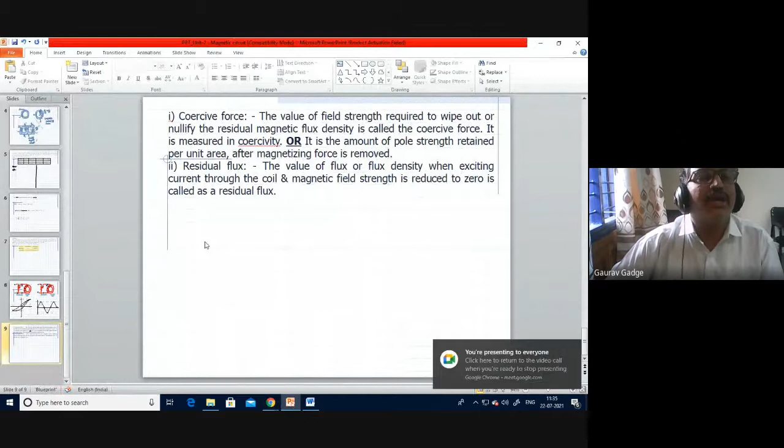So today's thought which I have shared, I think if you paid a little attention, every day I share one or the other thought so that everyone can understand, because you people are quite mature and you know everything.

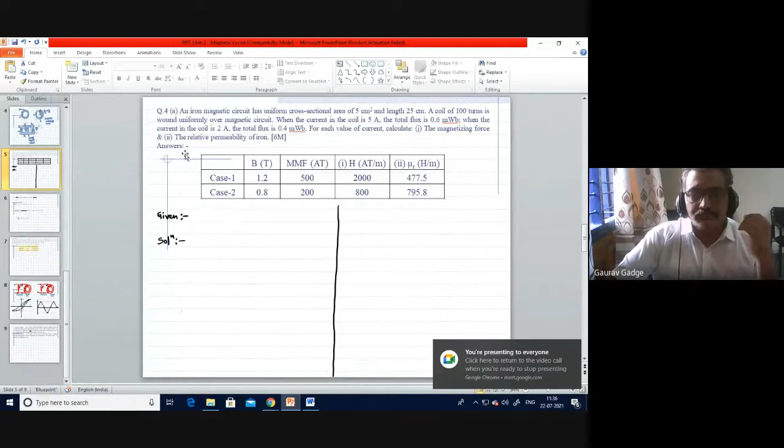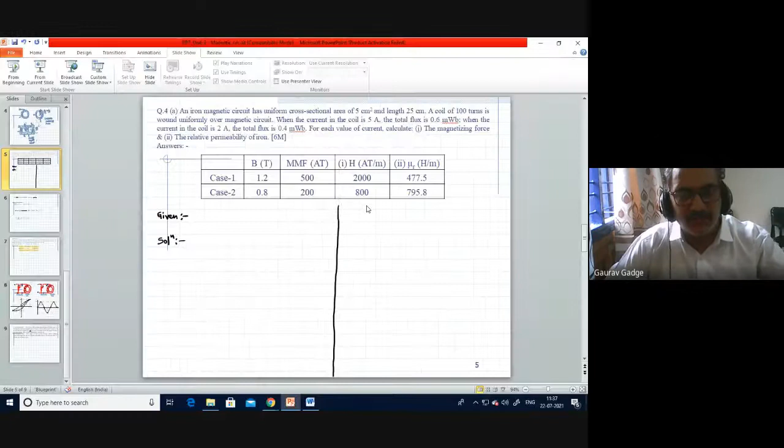So let us start with one more pattern of numerical which is generally asked in the examination. This kind of numerical, it was asked in the examination - a simple numerical, and here again you need hardly 1 minute or maybe less to solve it.

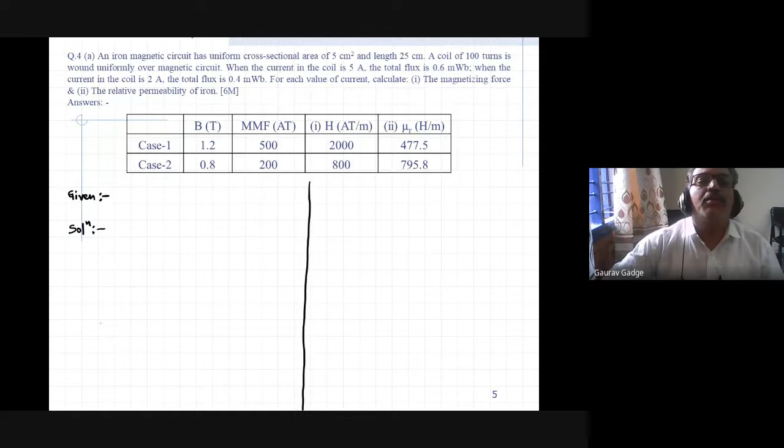Okay, so let us check what is given in the numerical. You have an iron magnetic circuit with uniform cross-sectional area of 5 centimeter square, and length of 25 centimeter. In fact, I want to ask you what are the given quantities - you can easily tell me which are the given quantities.

Can anyone tell me what are the given quantities? Anyone? What are the given quantities? Anyone?

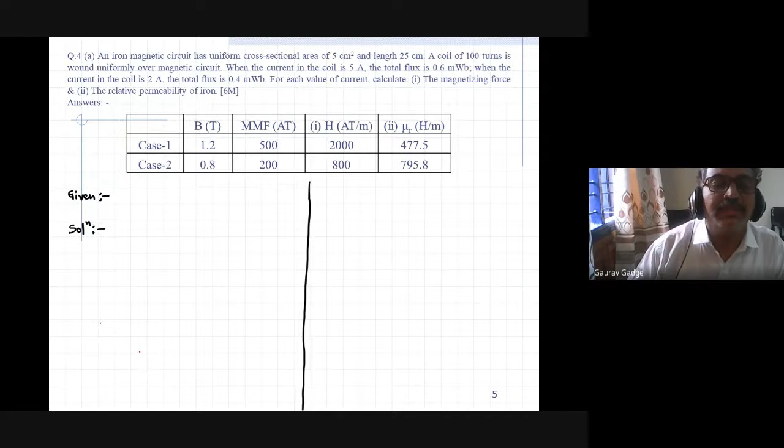Okay, so I just start writing down this cross-sectional area, first quantity. So area is represented as capital A or small a. It is 5 centimeters square. So the conversion is 5 into 10 power minus 4 meters square.

Then length of 25 centimeter, so it means small L. It is 25 centimeter, meaning it is 25 into 10 power minus 2 meter.

Okay. Then a coil of 100 turns. So what it means, we have N is equal to 100 turns, uniformly wound over a magnetic circuit. Now, when the current in the coil is 5 ampere, so we have I is equal to 5 ampere given.

Then total flux is 0.6 milliweber. So we have to convert quantities like centimeter to meter or centimeter square to meter square. Same way, milliweber to Weber is 10 to the power minus 3. You already have studied that scale in mathematics, like for the conversion of centimeter to meter or kilometer to meter. So all of you know.

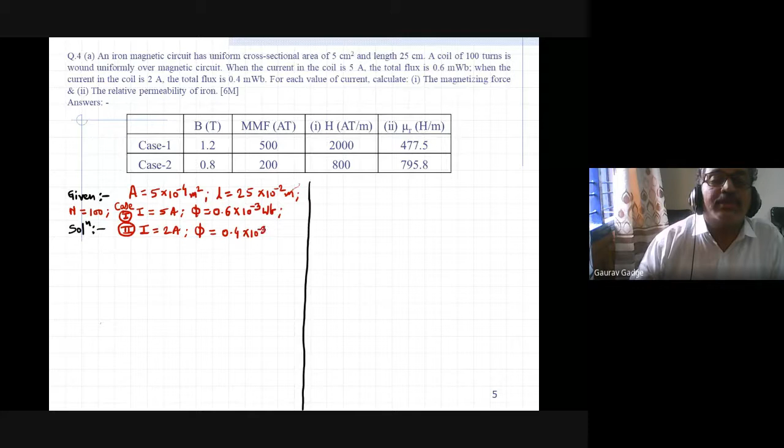So these quantities are given in the numerical with two cases, and for each case you have to find out the value of magnetizing force. Now, how is that magnetizing force represented? It is not a magnetomotive force, not MMF. This is magnetizing force, H. And the second quantity is relative permeability of iron, mu R. So these two quantities are unknown.

So now let us start with the solution. As there are two cases, let us find H and mu R for case 1. Now, let us write the expression. H we have to find out. Can you tell me the formula for H?

H is given by the equation, and all of you have to remember these equations, which are very important. H is equal to MMF upon L. Another equation for H is H equal to B upon mu naught into mu R. So we have two equations for H.

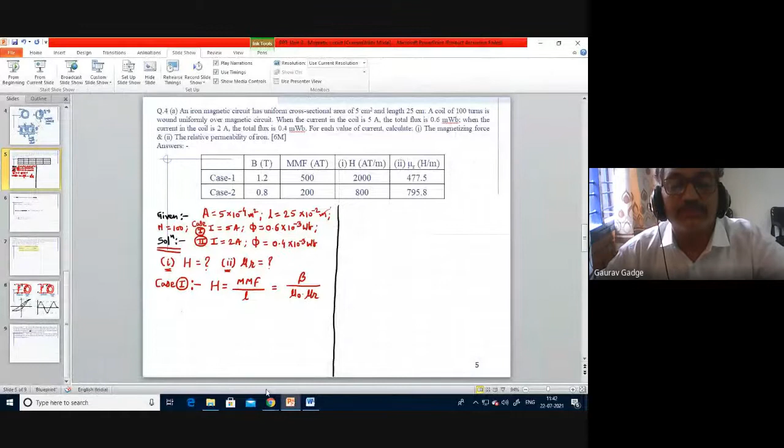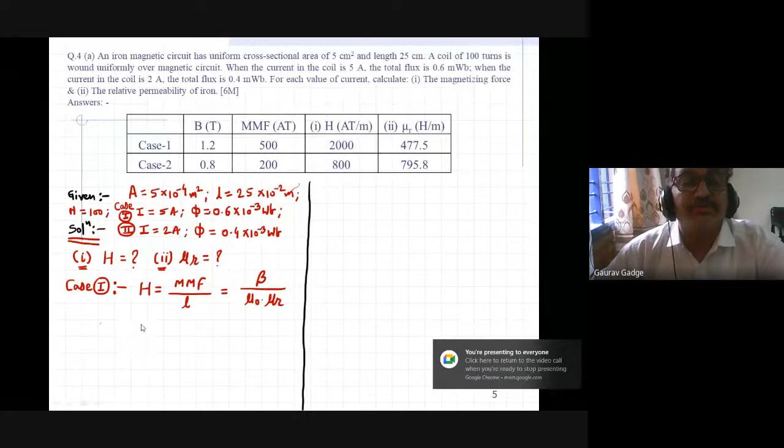Just a second, someone again wants to be in. It becomes quite difficult. Samir Kedar, try to be in the class sharp on time, because unnecessarily it creates problems for everyone. And for me it is bigger because I have to...

Fine. So I wrote two expressions for H. Either you use H is equal to MMF upon L, or H is equal to B upon mu naught mu R. In the second, you don't have the value of mu R, whereas mu naught is known. What is the value of mu naught, absolute permeability? It is 4 pi into 10 raised to power minus 7.

This you know, right? But you don't know the value of B, you don't know the value of mu R, and then you have to find the value of H. So it is quite difficult to find 3 unknowns. So let us use this expression: H is equal to MMF upon L. It needs MMF and L. L is already there, which is 25 into 10 raised to power minus 2. So MMF is unknown. Let us find MMF.

Now what is the expression for MMF? If you remember, MMF is given by N into I. It is equal to H into L, which we are already using in the above case.

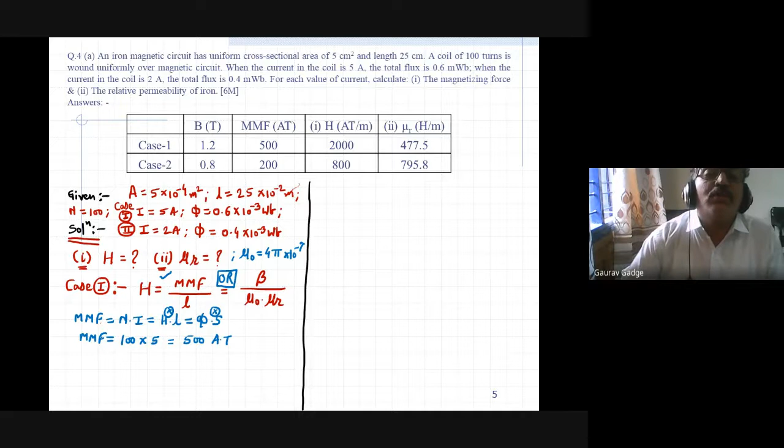MMF is equal to 500 ampere turns. That's all. Just check in the table. Yes, for case 1, just check in the table. For case 1, MMF is 500. Okay, now you can easily find out the value of H. So H is equal to, we use that equation, MMF upon L.

What is the value of MMF? 500. L's value is 25 into 10 raised to power minus 2, right? Now if I just take the 10 raised to power minus 2 upward, what I get is 500 multiplied by 10 raised to power 2, because it is written in numerator, divided by 25. Now just divide 500 by 25, otherwise you can use calculator. 25 twos are 50, so 20 into 10 raised to power 2, that is 2000.

So what is the value of H? It is 2000 ampere turns per meter. And this unit I have already shared how to get. H is equal to MMF, that is ampere turn, and length is meter. So therefore it is 2000 ampere turn per meter. Just cross verify whether we are getting the same answer in the table or not. Yes, we are getting the same answer. And this is for case 1 first quantity.

Case 1 first quantity. Now what you have to do? You have to find second quantity. And what is second quantity? Second quantity is mu r. Now how to get mu r? See, again you have two equations where you find that mu r. First equation is S is equal to, if you remember, L upon mu naught mu r into A. This is one equation. Okay.

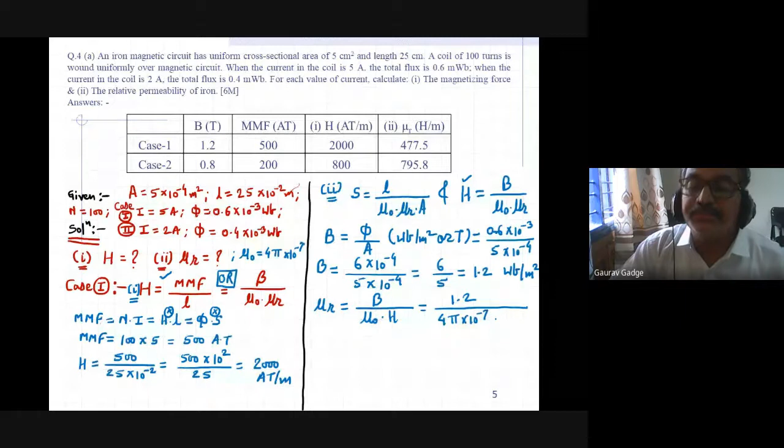Now, if we have B, if we have H, we can calculate mu r. So what I can now write is, just see very carefully, mu r is equal to B upon mu naught into H. Now, what is the value of B? That is already calculated, 1.2 Weber per meter square, upon 4 pi into 10 to the power minus 7, correct? Now, multiplied by H. What is the value of H? It is 2000.

Okay. Now, you have to use your calculator, because these calculations are somewhat difficult, where we have to use pi, and pi's value is 3.14 or 22 by 7. So it's always better to use calculator to get the value of mu r. And from table you can see my answer is mu r is 477.5, and its unit is Henry per meter.

Okay, so that's all. These are the answers which are asked in the numerical, first quantity H and second quantity mu r. So we have used two equations, H equal to MMF upon L for getting H, and for getting mu r we have used H equal to B upon mu naught mu r. So by adjustment, mu r is 477.5. Okay. Now, any question, any query?

So for case 1 we have done. Any question, any query?

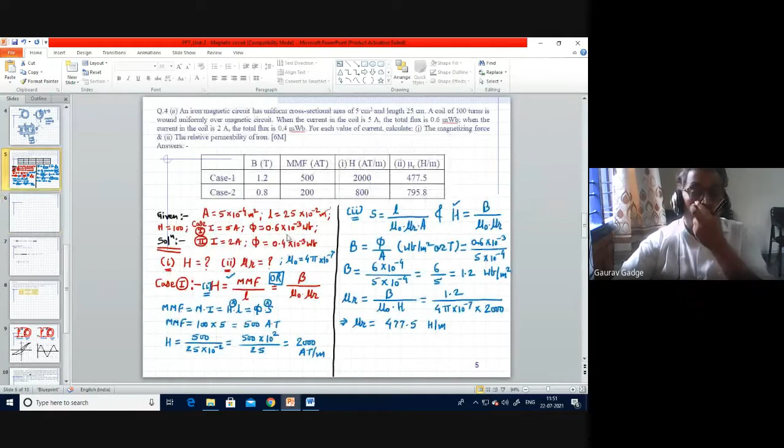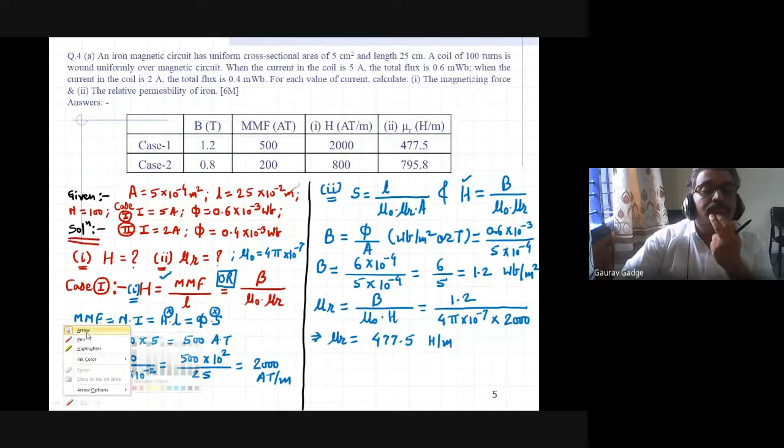Any question? So second वाला समझो. Second वाला. So S equal to L upon mu naught mu R into A. This is one equation, and in this you find mu R, which is to be calculated. So we can use this equation to get the value of mu R, but the only thing is here we again don't have the value of S.

So S can be calculated by referring MMF upon phi. By using MMF upon phi, we can find the value of S. So here we can use either this equation or this equation. Now H equal to B upon mu naught mu R. Here we have the value of H, but we don't have the value of B.

So what I did is I just preferred to have B ka equation. That is, it means I preferred to use H का equation instead of using S equation. S reluctance के जगह मैंने H magnetomotive H माने field intensity का equation use किया. So B की requirement है.

Anyone? Yes, sir. Okay, so there is no issue with case 1 now. Okay, so just start with case 2. Now what is there in case 2?

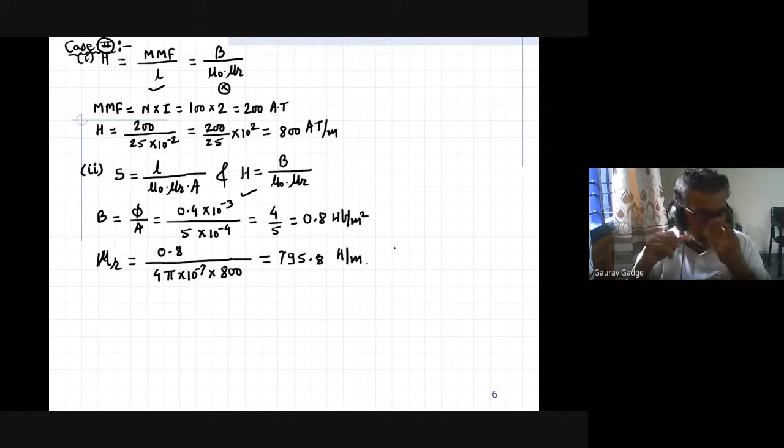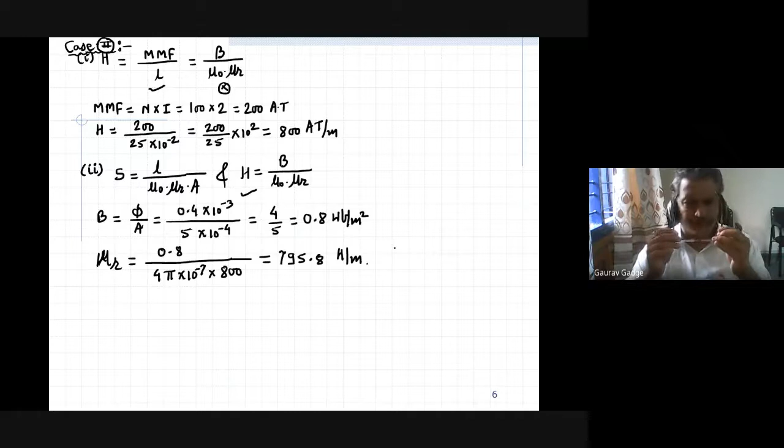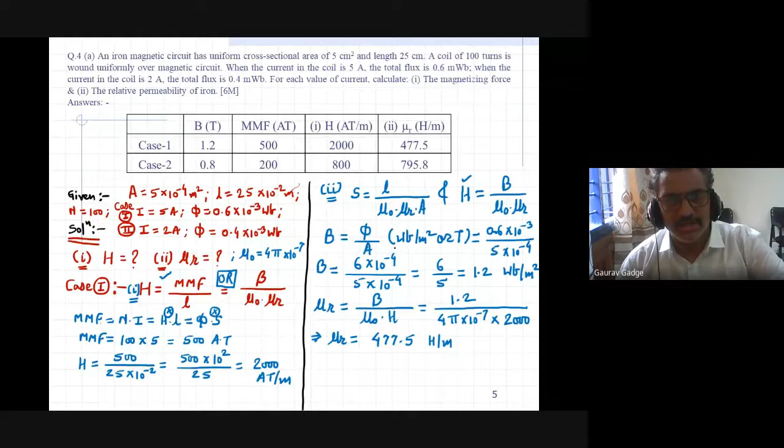Okay, so there is no question. Sure. So we are done with case 1 and case 2. Answers are written in the table, so that it can be helpful to the students who do these kinds of simple numericals faster than the others, so that they can check and cross verify their final answers. Okay, fine. So this is done with the numerical.

Now all of you are instructed to write this numerical. An iron magnetic circuit has a uniform cross-sectional area of 5 centimeter square, length of 25 centimeter. I think area and length are the same. Number of turns is 120. In the first case it was 100, right? And 5 and 25 both are the same. Number of turns is changed, and current is 5 ampere, flux is 0.6. Current is 1.5 and flux is 0.3.

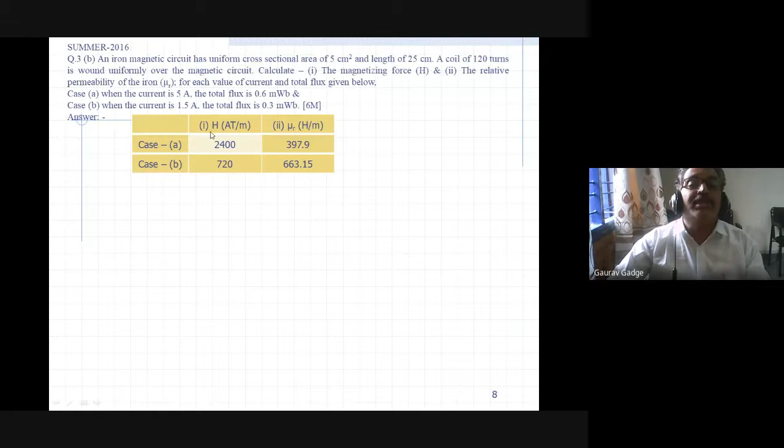So therefore you may find some sort of change in the answers. Okay, so all of you please check. The answers are H is equal to 2400 ampere turn per meter. Mu r is 397.9 Henry per meter. For case B, that is the second case, the value of H is 720 and mu r is 663.1.

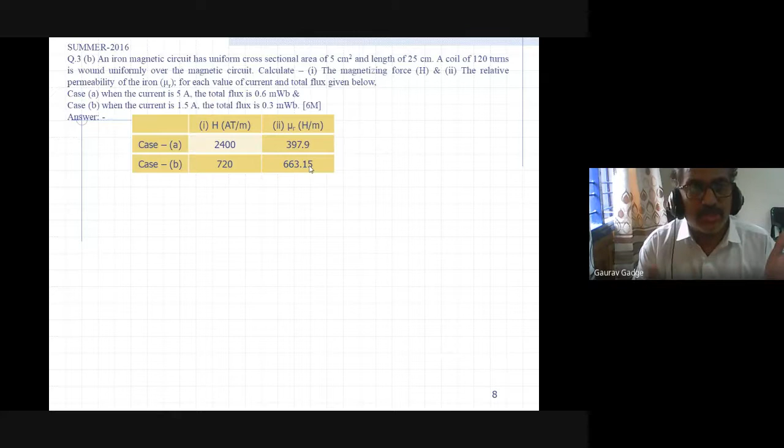So it is a bit confusing. Okay? So I just suggest you write whatever we have in the discussions in the diary.

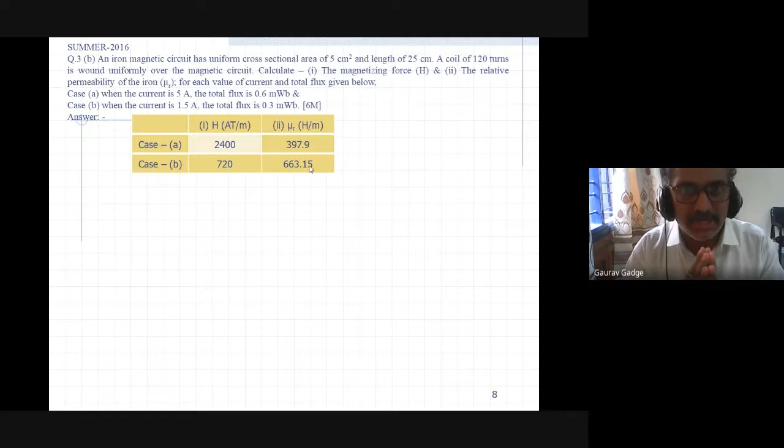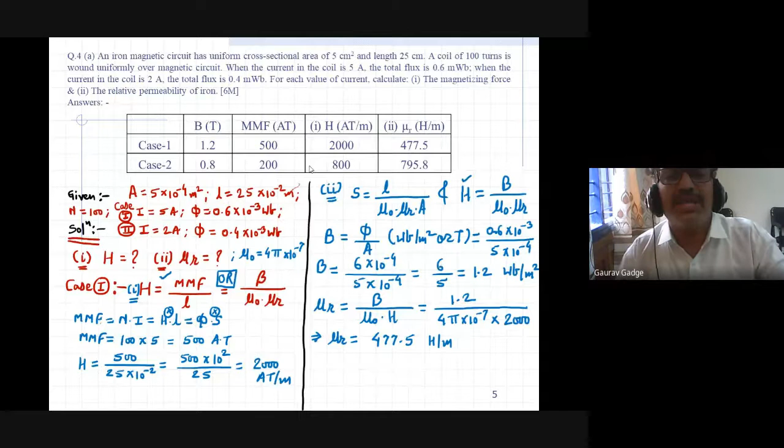Okay? So guys, hopefully you are now clear with this particular concept also. This particular numerical was asked in summer 2016. This other numerical, the year is not written here, but it was there in the examination. I still remember. Maybe after summer 2016. Okay. Now I'm going to discuss the last topic. This is your last topic, that is the hysteresis loop.

Hysteresis loop. If I move that pen fast, it creates a problem. So therefore I have to be very slow.

Okay, now we are going to draw the hysteresis loop, which is called as BH curve.

A loop means it started from one point and ended at the same point, that we call a loop. Like generally devotees do circles, when they pray in temple they do pradakshina, that is circles. Same way we have a loop, and another is BH curve.

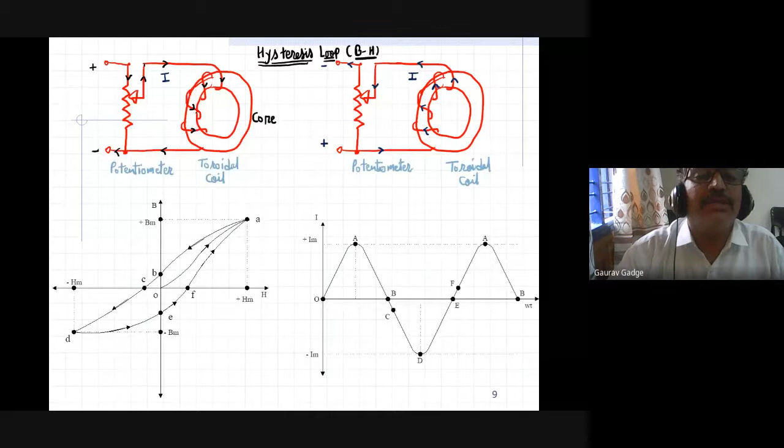These turns are called toroidal coil. This is called as toroidal coil, a specific name given to this kind of coil. Now this coil has two ends, this is the first end and this is another end. These two ends are connected to the supply source.

The supply source is given through potentiometer. Let us consider, there may be AC also, alternating current. So let us consider the positive is upward and negative is downward. Now with respect to that, we get the flow of current.

Now here, this is your varying current. This current is varying, increasing, so it is variable. So it varies, it's varying current. Now this varying current passes through the coil of the toroidal core. So this is your figure 1.

Same way figure 2 is drawn, but in figure 2, the positive is downward and negative is upward, so that we can get the change in the direction of current.

Again, we have a core, wound with certain turns of conductor so that it can form a coil, and potentiometer is present on left hand side. This potentiometer is basically to vary the supply.

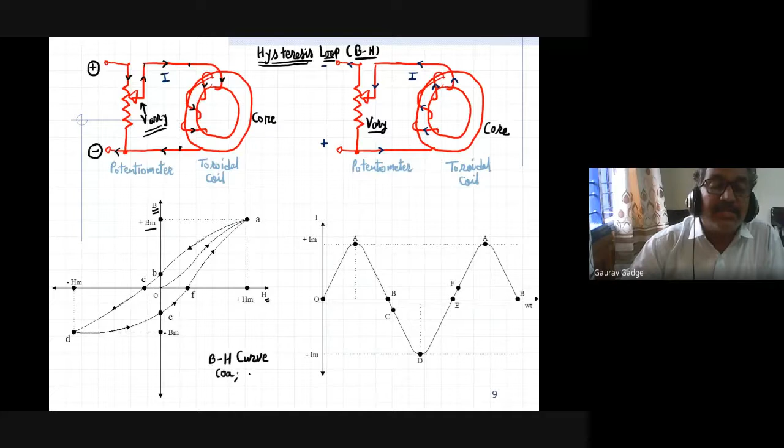A, B, C, D, E, F, A is a loop and OA is a curve. So just an example, OA is a curve, even AB is a curve, or BD is a curve, etc. These are the BH curves.

So what is a loop? That loop starts from O, and basically has to end at O, but as the magnetization is continuous, the loop starts from O, reaches small a, then passes through B, C, D, E, F, and comes back to A, and therefore it is referred to as loop. So this is one characteristic between B and H, therefore called as BH curve or hysteresis loop.

Then another curve, characteristics between current and omega t. You can see that current is on y-axis and omega t, that is time changing, is on x-axis.

Okay, now let us start with the understanding of these four figures. First, you just have to understand figure 1 and these two curves, figure 3 and figure 4. So I just named these figures as figure 1, this is figure 2, this as figure 3.

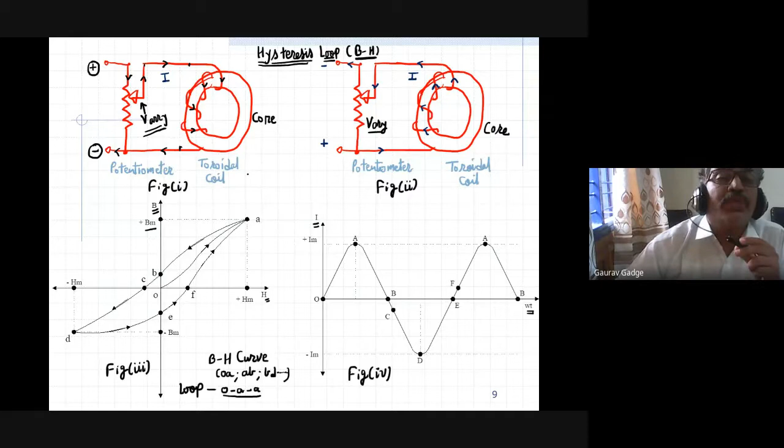Okay, so now let us apply the current. Now I think all of you know the concept.

अगर करंट कॉइल से पास होता है तो उस कॉइल के आसपास एक मैग्नेटाइजेशन डेवलप होगा, जिसको हम कहते हैं फोर्स ऑफ अट्रैक्शन, फोर्स ऑफ रिपल्शन। सो दैट मैग्नेटिक फील्ड फॉलोज द पाथ ऑफ द कोर। ये जो कोर का पाथ है, इस कोर के पाथ को वो फॉलो करके जाता है।

Now that magnetic flux, as slowly you are increasing the amount of current, to check the value of change in current I have drawn that curve characteristics in figure 4. So from O to A, current starts increasing and reaches its maximum value. Capital OA is increase in current.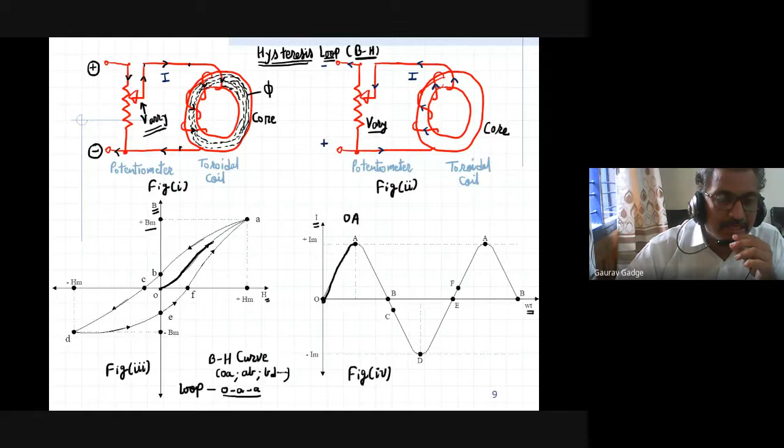With respect to that, the magnetic field starts developing, and therefore the magnetic field also starts from O, the initial period, and getting a certain curve reaches to small a. So this small OA is the magnetic flux.

Why we are saying flux? Because flux density is given by the equation phi upon A. अगर करंट इंक्रीज होगा तो डेफिनेटली फ्लक्स इंक्रीज होगा, और अगर फ्लक्स इंक्रीज होगा तो फ्लक्स डेंसिटी भी इंक्रीज होगी। So as current increases, flux increases, and if flux increases, flux density also increases.

नाउ नेक्स्ट इज, अब आप सप्लाई डिस्कनेक्ट करते हो। जैसे आप सप्लाई डिस्कनेक्ट करते हो, करंट यहाँ पर डिक्रीज होना शुरू करता है, और दैट अटेन्स बी वैल्यू, कैपिटल बी।

सो इन OA करंट इज इंक्रीजिंग, लेकिन A से B तक करंट डिक्रीजिंग, करंट यहाँ पर डिक्रीज होना शुरू करता है। What is the effect of it? अब ये कोर जो आपका मैग्नेटाइज हो चुका है करंट की वजह से, that magnetization also reduces। मैग्नेटाइजेशन रिड्यूस होता है और इट अटेन्स पॉइंट बी, small point B।

So now AB, where small ab is flux reduced, capital AB is current reduced. Current and flux both are directly proportional. यहाँ से आप देख सकते हो करंट और फ्लक्स दोनों डायरेक्टली प्रोपोर्शनल हैं। करंट इंक्रीज हुआ तो फ्लक्स इंक्रीज हुआ, करंट डिक्रीज हुआ तो फ्लक्स डिक्रीज हुआ।

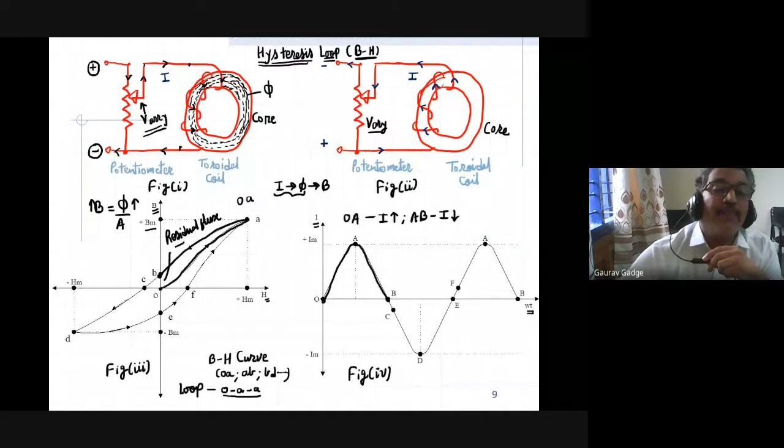Now similar way here you get OB, this point is called residual flux. रेसिडुअल फ्लक्स का मतलब क्या हुआ कि सप्लाई तो आपने ऑफ कर दिया, बट स्टिल वहां पर उस कोर में, बिकॉज कोर इज द मीडियम विच लिंक द फ्लक्स, तो उस कोर में जो फ्लक्स अवेलेबल है उसे हम कहते हैं रेसिडुअल फ्लक्स। यानी रेसिडेंस में यानी घर पे जो फ्लक्स अवेलेबल है उसको हम कहते हैं रेसिडुअल फ्लक्स। OB is called as a residual flux।

अब इसका मतलब क्या है कि फ्लक्स तो आपका A से B की तरफ आ चुका है, उसी तरीके से करंट आपका A से B आ चुका है, बट B is the zero point for current, whereas this small b is not the zero flux for current।

तो therefore आप सप्लाई सोर्स को रिवर्स करते हो, यानी नाउ यू हैव टू रेफर फिगर 2। अब आपने सप्लाई सोर्स को रिवर्स किया, यहाँ पर आपने क्या किया कि सप्लाई दिया, फिर सप्लाई को डिस्कनेक्ट किया, और उसके बाद फिगर 2 में सप्लाई को रिवर्स किया।

जैसे सप्लाई को रिवर्स किया, पॉजिटिव नीचे मैंने दिखाया है और नेगेटिव ऊपर दिखाया। और जैसे सप्लाई को रिवर्स किया, करंट स्टार्ट्स इन द उल्टा डायरेक्शन, रिवर्स डायरेक्शन में। अब करंट जैसे रिवर्स डायरेक्शन में पास होगा तो उसी तरीके से यहाँ पर मैग्नेटिक फील्ड भी डेवलप होगी। सो नाउ यू स्टार्ट गेटिंग द उल्टा, दैट इज रिवर्स मैग्नेटिक फील्ड।

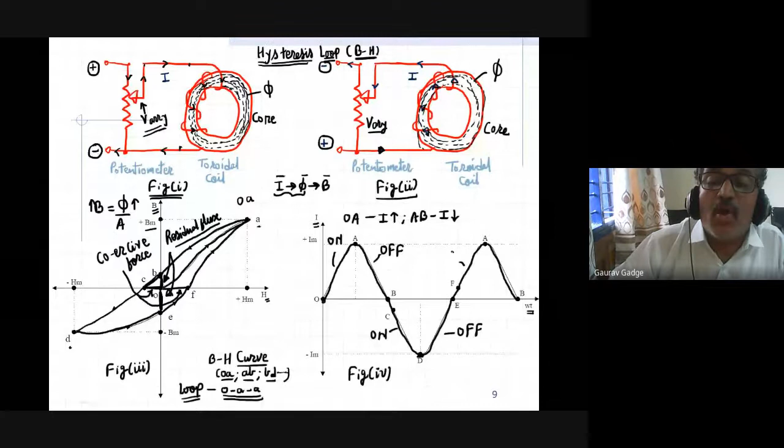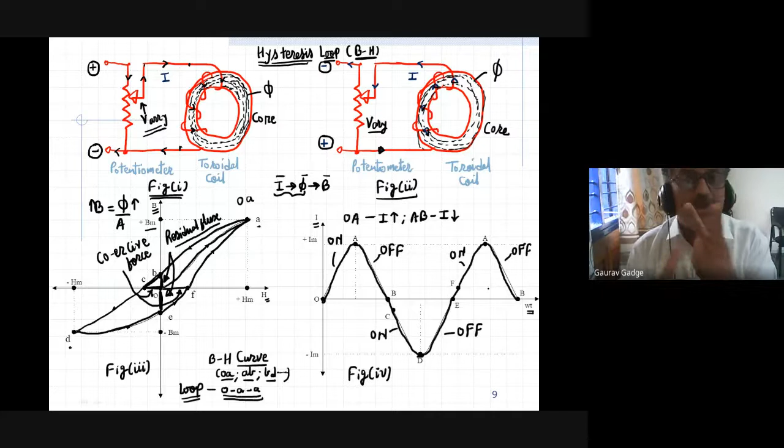That's all. Okay, so here I have completed this explanation for the hysteresis loop. I just want to show you the definition of the two terms I mentioned, one is coercive force and residual flux. Let's look at both of their definitions.

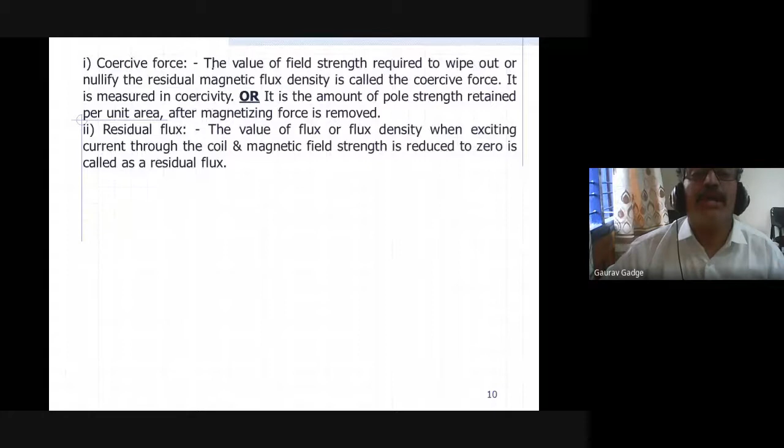Just take this. So coercive force - first, the value of field strength. This is on H, on the x-axis, maybe on negative x-axis, positive x-axis. So this is called coercive force.

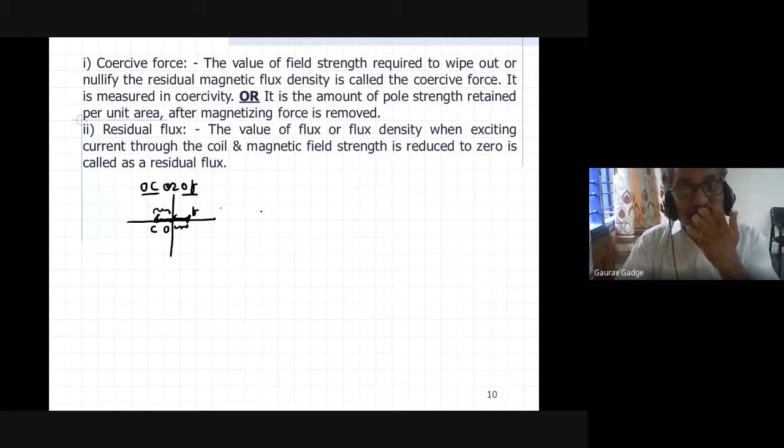So the value of field strength, so OC or OF is the value, from here to here, the value from O to C, the value from O to F, this value is called coercive force. This value is called coercive force. Okay. So the value of field strength required to wipe out or nullify the flux or residual magnetic flux density is called coercive force. Okay.

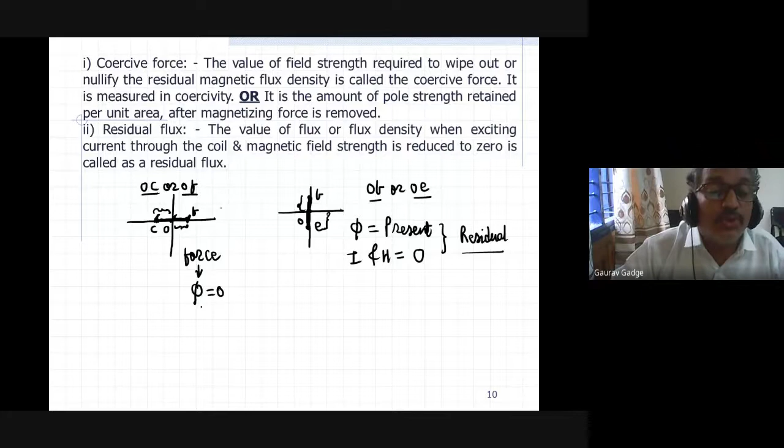Okay. Then the force which is used to make the flux zero, because here there is flux, here there is residual flux. So the force which is used to make that flux zero, the strength used to make the flux zero, that force is called coercive force.

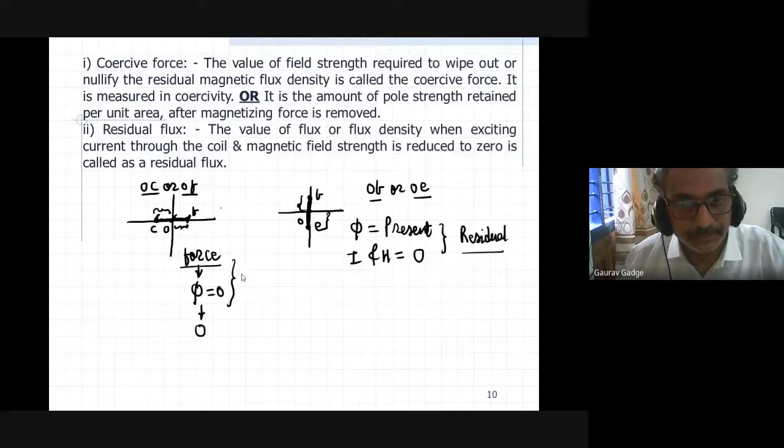Is it clear to all? Any question? Any query to anyone? Yes, any question, any query? There is no query from your side? Sure.

Okay. So today I have done with unit number 2 also. From tomorrow I am going to start with unit number 3. Tomorrow is 23rd July, so from 23rd July onwards, whatever number of lectures I get, I have to complete the syllabus of the remaining 2 units. So be attentive in class, and go through the recordings if you don't get any topic or portion. It's good that 52 to 54 students are in the class. So I have done with the portion.